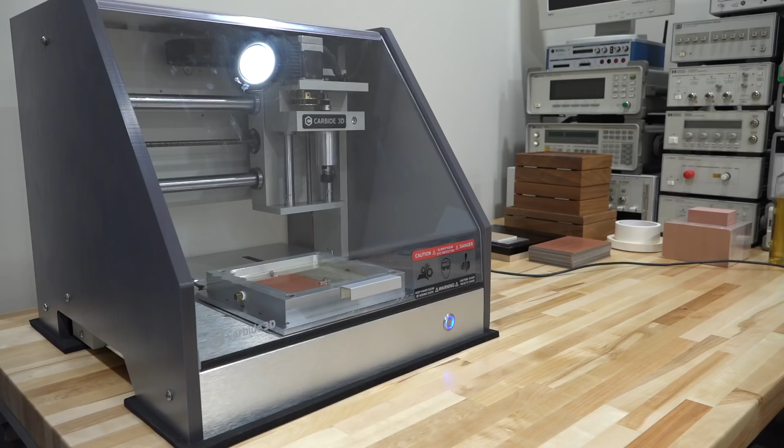In this episode, I've got another product review for you guys. Now, I've been wanting to get myself a CNC machine for a very long time. Of course, in my lab, I'm mostly interested in making PCBs, and a CNC machine can be used for that and a whole bunch of other applications. I was surprised to find out how many different models are actually available across a huge range of prices.

So eventually, after doing a lot of research, I ended up buying the Carbide 3D's Nomad 883 Pro, which you're looking at. Now, this is not a cheap machine. This is about $2,500. And any accessory that you buy for it is going to, of course, increase its price. So I ended up spending about $3,000 in total, American dollars.

Now, Carbide 3D is an American company, and everything is manufactured and built here in the United States. This is a very custom machine. So after doing a lot of research, I thought that this was the best bang for the buck. And I'll talk about a little bit of advantages and disadvantages and do a quick comparison with a few other machines. Now, since I'm a new user, I thought it would be also interesting to go through the procedure of making one PCB and see how it turns out.

I've also made some modifications to the machine which you might find useful if you want to do the same thing to your machine. So let's go ahead, take a look at some of the specifications, just a quick overview, and then we'll take a look at the machine in detail and see what we can make with it.

Well, let's take a look at this unit. Now, as you can see, it's a fully enclosed instrument here. And this enclosure is pretty important because it keeps the dust out, gives you some sound protection, but most importantly, it keeps you safe because those bits are very hard material and very brittle. And when they break, and they will break if you do something wrong, they will fly out of the machine and it can be quite dangerous.

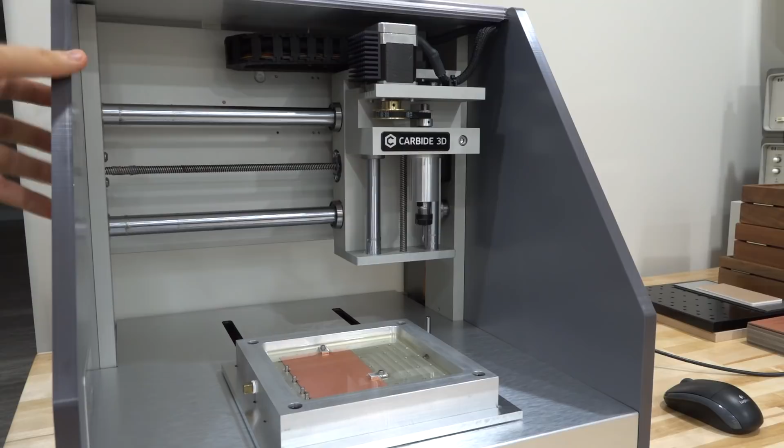Now, one of the main reasons why I bought this unit as opposed to some of the competitors is that this is a full aluminum chassis machine. So even though you see these HDPE sides and you can choose which color you want when you buy this unit, these are essentially just for the enclosure. The structural integrity of the machine is completely based on an aluminum chassis, which is custom made. So even if you remove this, the machine will be just fine. And I really like that. As you can imagine, you do want something that's very solid, and this definitely provides that.

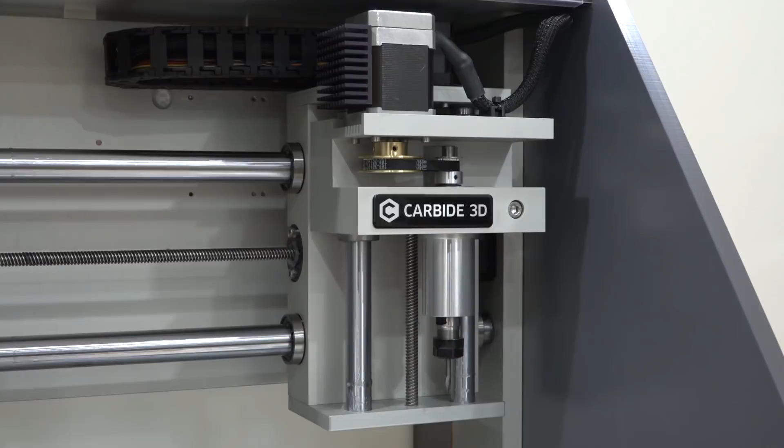Now, the spindle in the middle is also a completely custom design. It's somewhat of an unusual design. And if you look closely, you can see there is a belt-driven system. So we have a brushless motor with a belt connected to the spindle. Now, after the belt ratio and everything, the maximum RPM we can get over here is 10,000 RPM. And this is really one of the main limitations of this unit.

I would have loved to see this be able to do 20,000 or 25,000 RPM, especially for doing PCB and precise work. This would be quite handy. Now, at 10,000, I guess it's fine for the applications that I want, but I would have loved to see 25,000, especially because some of the other competitors do go to higher RPM. Of course, they do cost more as well.

This heatsink that you see here is something that I installed. Over long work, this thing can get a little bit warm. It's not really necessary. It's just to make it run a little bit colder and take the edge off.

And if you look carefully, you will notice that the main spindle, as well as the bottom, which you cannot see right now through the camera angle, these are all riding on 20 millimeter bearings. So there are no belts that drive anything in this. Everything is riding on bearings, which is fantastic, gives you very high precision. The slope of the screw here used to move the X, Y, and Z is chosen as a compromise between speed and accuracy. So you can have fast movement as well as very precise movements, and we'll take a look at the specification in just a second.

Cable management is great. I really like that. You can see there's absolutely nothing that can get in the way. All the cable is contained within this unit over here, and as the head moves, it will just unwind and wind back, and everything is very nicely done. I don't see anything sticking out that could potentially get caught, or during aging, it can get in the way. So I'm very happy with the custom design of this.

Now let's take a look at a couple of other things here. Now here you can see obviously the table will move back and forth there, and I will talk about what this piece is. This is a custom piece that I've made for the machine for some specific reasons, and we'll go over that when we're doing our experiment.

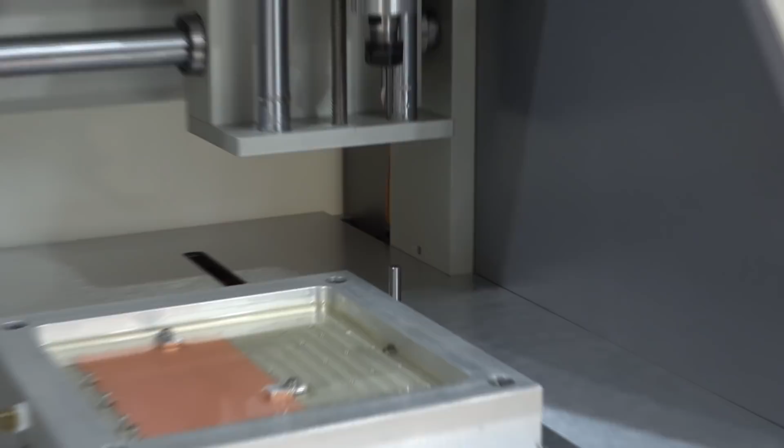And if you look over here, there is a tool depth measurement here that will be automatically built into the machine. This is a huge help. If you've ever used any of these, you will know immediately why. So every time you change the tool, because you don't exactly know how much you've inserted the tool into the spindle, this will remeasure and give you exactly the same reference point each time. Very handy, especially because this is done automatically. When the machine tells you that there's time to do a tool change, it will automatically do that for you.

So everything else other than that looks very nice. We've got power here, which is right now turned on, and the only two interfaces to the machine are a power supply and USB, and that's it. And the power supply is quite large, as you can imagine, because it needs to run all the motors and the spindle and all the electronics. You cannot see any of the electronics. It's all embedded at the back of the unit there. Very nice, very happy. It's quite a good looking machine actually. So let's go ahead and take a look at some of the specifications, do a quick comparison on the computer, and then let's see what the software does.

And here's the specification for the Nomad 883 Pro. And as you can see, the travel in the X and Y directions are 8 inches each. This gives you roughly the largest PCB area that you would be able to work in, or any other material that you would want to put through the CNC machine. The travel in the Z direction is 3 inches. Now that doesn't matter if you just want to do PCBs, but it will become important if you want to work on any other material.

The speed in the X, Y, Z directions are fairly typical. The mechanical resolution and repeatability are quite good. 1.5 mil for repeatability is respectable. And the mechanical accuracy of 5 mil per foot is also fairly respectable. Now the spindle speed is limited to 10,000 RPM. Yes, I wish this was better than that, especially for PCB work, but here it is and we will see how it performs. Everything else is really pretty straightforward.

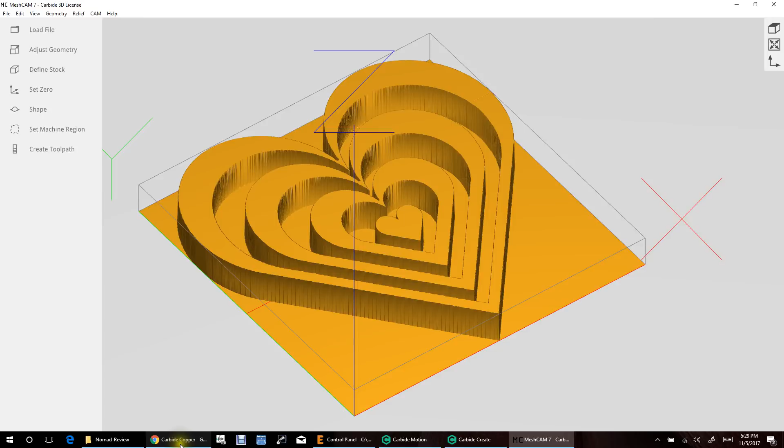Here I just simply loaded an image, and it will interpret the image as 3D, and it can do all kinds of fancy work on it. Really nice, not PCB related, but nonetheless it can be quite handy. Now, there's another beta software that Carbide has released, and it's called Carbide Copper, and this one runs in your browser. This will allow you to put a Gerber file into it, and then it will create for you all the machine code required to download it into the Nomad.

Now, this is in beta and it's very, very limited. And as far as I could tell, you cannot tell it, for example, the depth of drilling and all that. It just creates a toolpath for you, and it has some default value, and I couldn't figure out what that is. Again, this is an experimental software, but we'll use it anyway, because as a brand new user of CNC machines, I just wanted to know how easy it is to go through the entire process.

So what should we try as our first board? Well, I could design a board and make a schematic and do everything. I'm going to save that for a different video. I have some microwave designs that I want to share with you guys, which should be pretty fun. But right now I just want to see the flow. I want to see what kind of board I can produce.

So I went ahead and made in Eagle a very simple board, and this is it. It's a tiny one. It's 29.5 by 40.6 millimeters, and it has some features on it, as you can see, some drawings of shapes, just to see what comes out. So let's go ahead and open this and take a look and see what kind of dimensions we're dealing with here. So I have set my grid to 0.25 millimeter.

Now that's equivalent to about 10 mils, just under 10 mils. So some of my structures are tiny. For example, this one here is just a 10 mil by 10 mil square and spaced out by 10 mil to the adjacent one, and it slowly grows to be larger and larger and larger. So we can see what happens to these structures.

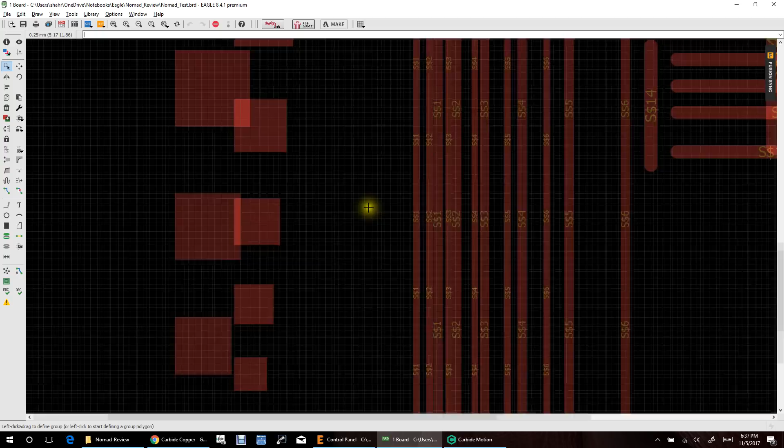And I have some lines here. These lines are also 10 mil, just under 10 mil, 0.25 millimeter, and the spacing varies, as you can see. Some circular structures, some thicker lines, some wider circles. These are half a millimeter, these are 1 millimeter. So you can see a few different structures. So we should be able to use this.

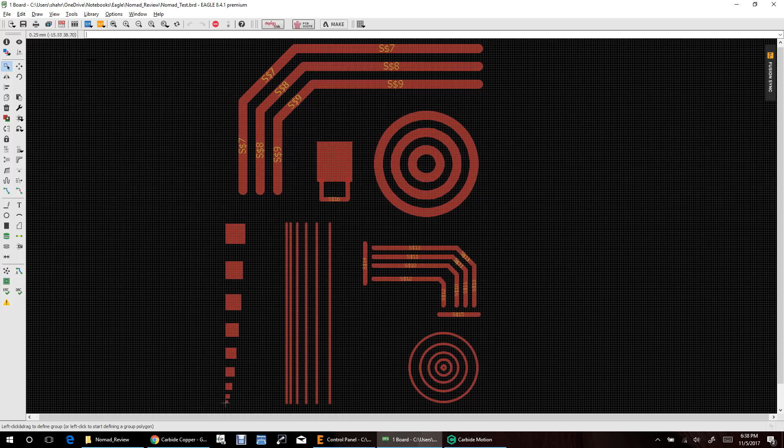Now, what can we do with this and how can we get it into the machine? Well, you need a processor, a CAM processor. It turns out that in order to create the proper Gerber files for our machine, Carbide 3D has already created a CAM processor specifically for Eagle. So we can go ahead and open it. Here is Carbide 3D's CAM processor. We open that, it sets everything for us.

It's going to create a Gerber RS274X version. Now we only are using top layer, so that's not a problem. So we've already selected the top layer there, and we can go process selection, and it will create our Gerber file. Is it there? We can go in the directory, and yes, indeed, it is there. Here is our top layer Gerber file. So now what do I do with this?

Well, I can go back to Carbide Copper, the online site and the online application. Now remember, this is very, very primitive, as I already described, but let's go and see what we can do with it. So this is a bottom side only. Sure, I can also fool it and say that it's a top side. It will just mirror it. It really doesn't matter. So bottom side only. Go next. Here I can load my Gerber file. Load it, and it should show up here. There it is. Here's everything.

Very nice, and you can see it's showing very clearly the isolation passes. So it has 3 isolation passes around it. Now I don't necessarily want 3 isolation passes, so let's try 1 pass. What the hell? Let's see what happens. So 1 pass here, just 1 time around, and just want to see what kind of margins we can get around it.

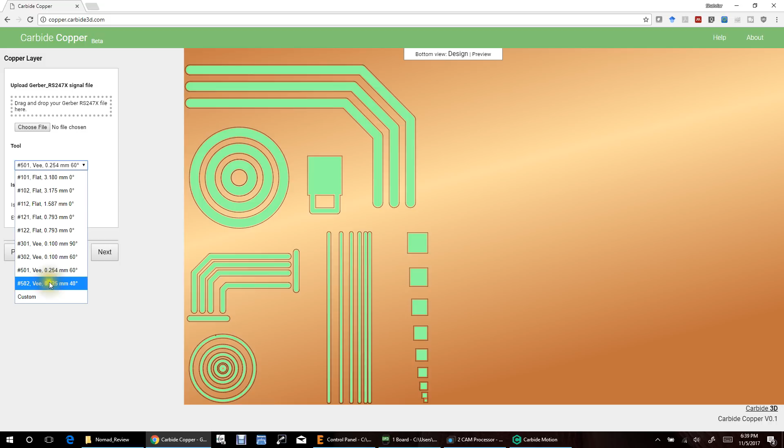Now, what tool are we using? Well, we're going to be using the 502. This tool is also from Carbide 3D. We can purchase that, and it's a 40 degree 0.125 millimeter. Okay, perfect. So we can go next. Now I don't have any drill holes, none of that stuff. So we can go next. We can ignore the outline. Forget all that. And there it is.

And this is what we're supposed to get from the machine. If I zoom in here, you can see some interesting features, for example, like that. So you can see it has only 1 clearance pass around each layer. So I'm very eager and curious to see how this would turn out. So now I can save it, generate and save to disk. There it is. It just creates this undefined file. So now I'm going to have to copy it into my directory and load it into the software.

Okay, we got our code right over here. So we go now to Carbide Motion. We're going to load this new file, the Nomad test. There it is. It gives you all the information about the toolpath extents that show up. Now we're ready to actually zero the machine. Obviously, you can't just run this. You have to make sure that the bit is in the correct location. So enough of the software. Let's go back to the machine.

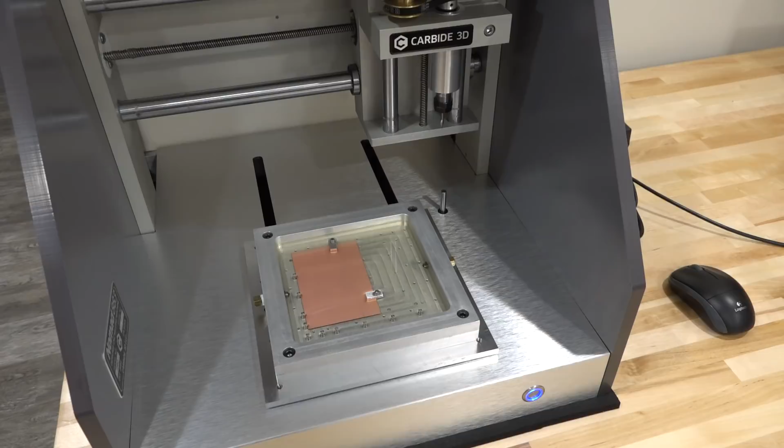So let's get the machine ready, but let's talk about dust control for a second. Obviously closing the machine will control the dust, that's no problem. But as with any machine, once you start milling anything inside, dust is going to get everywhere inside the machine.

It's going to land on the bearing, it's going to land on the gears. You're going to have to constantly clean it. It can go through the gaps and end up on the table. So there's a couple of ways to avoid that.

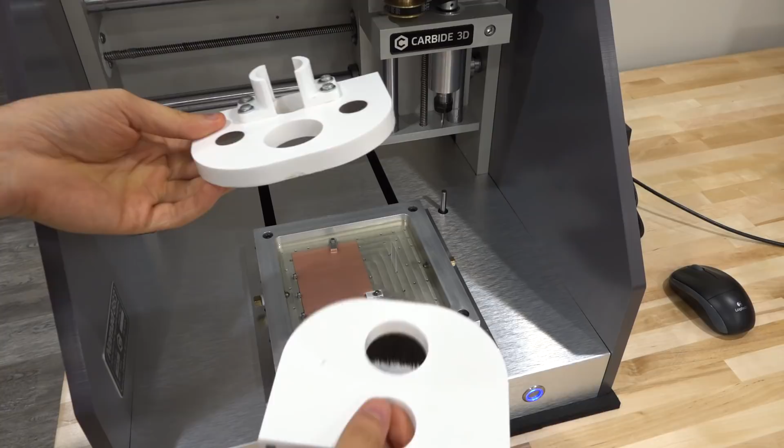The clever people on the Carbide 3D forum have created something like this. Check this out. This little guy, which was actually machined with this machine also, can be attached to the spindle. Once attached, this part is permanently there, and the spindle will go right through here so the bit will be essentially touching whatever you're trying to mill, and this wouldn't be in the way. Then at the bottom piece we have this, which has got brushes on it, and this can be magnetically connected to the other one, like this.

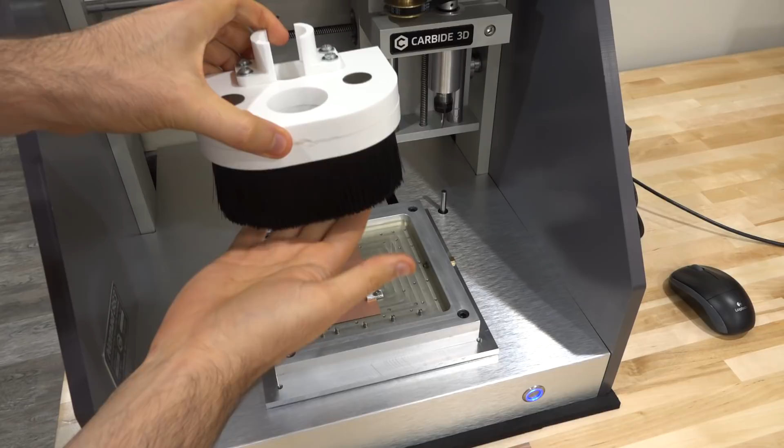There you go. Now they're both attached to each other, and underneath this area is where you'll be doing any work. Then you can have a vacuum connected to here, so it will suck air out as well as all the particles and dust that's generated. When you're done, you just remove this, change your tool, and put this guy back there.

So the air will flow through here and out of there, and of course it will carry all the particles with it. This is great when you have something with various heights, because this will accommodate different heights. It's very good for CNCing things that create a lot of dust, like wood or maybe even metal, if you have sufficient airflow to carry it out. So this is good and nice, but not quite suitable for PCBs or for what I wanted, and it can get kind of in the way.

So what I thought to do is something totally different. Now for PCBs, the situation is actually a little bit more complicated, because especially if you're doing things like FR4 - this board is not FR4, it's FR1, but if you're using FR4, that's basically glass.

And when you mill that, you can get particles as small as 30 micron. So you'll have to filter those really well with a HEPA filter, otherwise it's going to end up in your lungs, and it's really, really bad for you. So take that very seriously. This is not something to be taken lightly. It's quite dangerous to breathe in dust, glass particles like that.

So I thought, let's do something to avoid that, and I came up with this solution. Now this obviously doesn't ship with the machine - this is something I specifically made for this machine. So this is an aluminum plate that sits on top of the existing plate that the machine comes with. It screws into this, and it has to be extremely flat because we're going to be using it for PCB milling.

In there are pins to allow you to align your PCB and little clamps to screw onto this surface, so the PCB is really nicely sitting there, completely flat, and cannot be moved. It can even be flipped once you want to do a more than one layer design there.

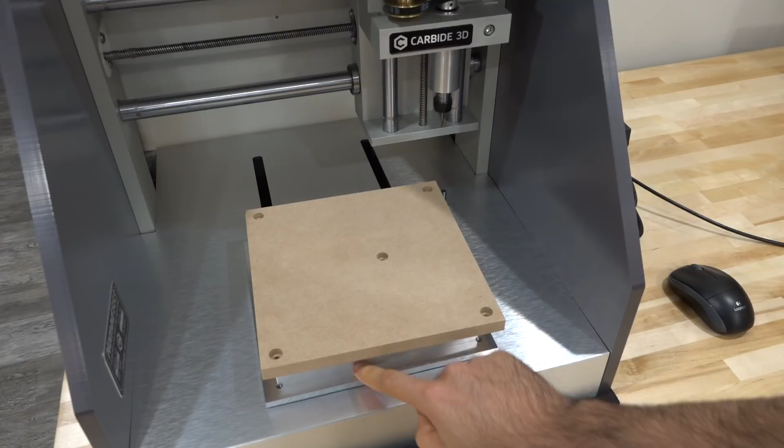Normally, the machine will come with something like this, which gets screwed onto that original plate underneath, and then you tape your PCB with two-sided tape on top, then take the tape off. But I didn't want to go with this direction, though it's definitely a possibility. You can also buy a metallic plate with a lot of screw holes for flexibility in attaching different things to the machine, but this isn't required here. So, we're good.

We're ready to go. Now we just have to initialize the machine and zero it. Zeroing the machine is a little bit tricky for PCBs, but we're going to take a look and see how that's done. First, let's go through the initialization.

After you initialize the machine, which is really straightforward, you can align and zero it. Here we have a very basic set of controls which allows us to move the machine in all three axes with various increments, the smallest being 0.01 millimeter. I can change the increment to 1 millimeter or use fast mode, which moves it quickly so you can get to your final position, and then reduce the steps to fine tune it.

Bringing the X and Y to the zero position is easy. Bringing the Z to the zero position is a little bit more tricky, and I have a little method to do that using a multimeter.

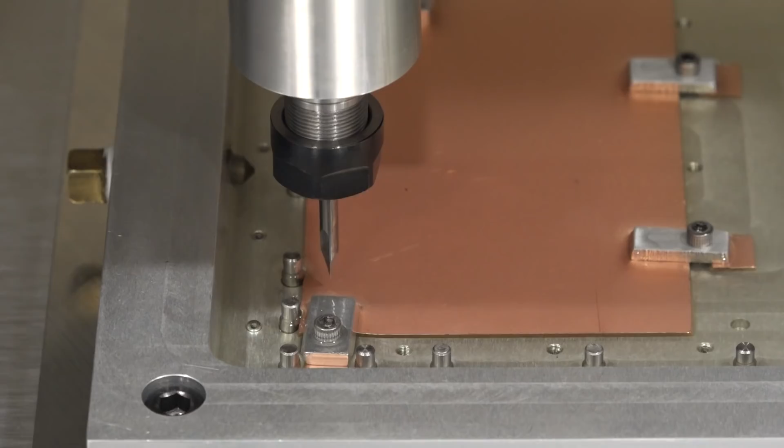Let's take a look. I've brought the tool very close to the surface of the PCB. It's not quite touching. I'm happy with the X and Y position—I could maybe move it a little bit in each direction, but I'd say I'm pretty happy with where it is right now. So we can go ahead and try to zero it.

So the question is, how do we detect when the tool touches the PCB? It turns out there's a difference in resistance we can easily measure. The resistance between the tip of this probe and the chassis, when not connected to the PCB, is about 150 ohms, sometimes about 50 ohms—it has to do with the bearings and the position of everything, because the machine is connected together electrically, but not very well. But as soon as the tip touches the surface of the PCB, we get roughly 0 ohms, so we can use that to detect contact.

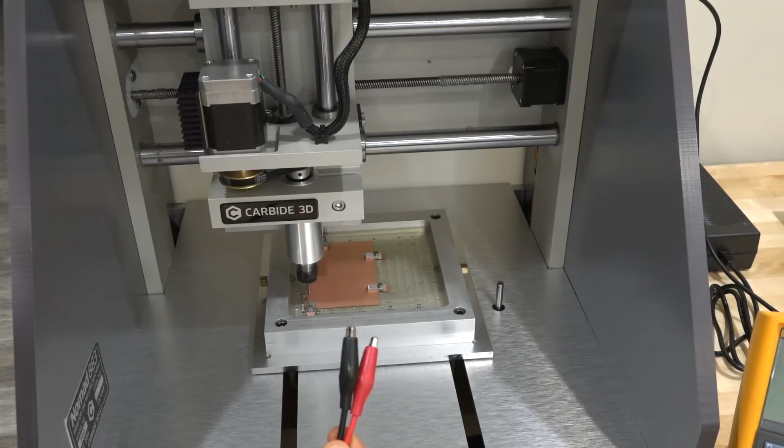How do we do this? We can connect two alligator clips directly to the tip of that bit and to one of the screws holding the PCB down. That should be pretty easy. Let's set that up—and here is our setup.

The resistance between the tip and one of the screws holding the PCB is 128 ohms, and I can very slowly move the tip down, getting closer and closer to the PCB until we hit 0 ohms. I think it's almost there. Let's keep going—you can see the resistance changes a little bit each time there's a step, because of the positions of the bearings. But we're getting closer and closer to the point where it touches the PCB.

So I'm going to keep going until I get that resistance down. It's very difficult to see or judge the distance. There you go—we're still good. We should almost be there any second now. There you go, there it is.

Zero. So now if I move it up by exactly 10 microns, 0.01 millimeter... if I move it down by 0.01 millimeter, we get a short. If I move it up by 0.01 millimeter, we have nothing. So we're at the resolution of the machine here—as precise as I can possibly get it.

So now what I do is raise it by 100 microns, 0.1 millimeter. Why that number? Well, in the software that you saw, I actually can't control the depth in which it goes down.

And I did some experiments, and I think 0.1 millimeter should work, or it may not be enough. But anyway, this is an experiment, we'll find out. So right now where it's shorted, I will move it up by exactly 0.1 millimeter, and then we're going to run the code and see what happens.

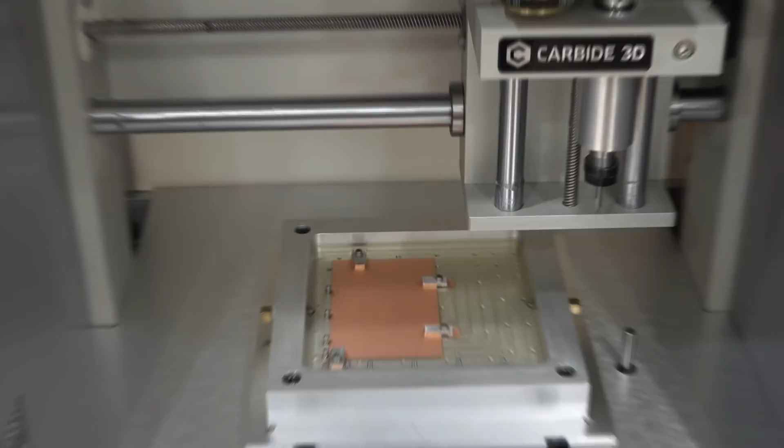So let's see what happens. That's exciting, here we go. Let me zoom in here. It's going to get started. Here's the motor, and here's the first position. There it is, it's doing it.

So I'm not sure if the depth is correct, but we're going to find out. Here's the first one—oh, I don't think I can focus that much. I don't know how well you can hear me, but the machine is actually surprisingly quiet. So now we're going to let it go through all this and see what happens, and I'll let you know exactly how long it takes.

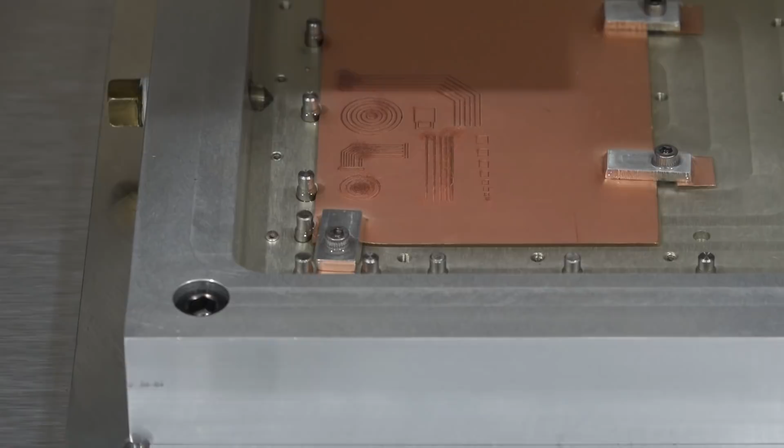And here we go, we're done. So now we're going to take this out, clean it up, and put it under the microscope to take a look at some of the features. Looking at it, I can already see that the depth was too much and it basically destroyed some of the traces. But we can still get some information about the quality of the traces, and then we can judge and adjust for our next PCB.

Alright, here is the result under the microscope. As you can see right off the bat, we have a flatness problem. On the very right side of the board, this is where the clamp was, and the board is the lowest, so the drill bit didn't have enough penetration to actually clear the copper completely away. As we move away from the clamp, the board rises a little bit, and then we have sufficient penetration. Now these lines are our thinnest lines.

They're supposed to be 10 mil, just under 10 mil, 250 microns. So let's do some measurement on these lines. Let's take this one over here, for example. I'm measuring right across it as well as I can with my mouse here, and we're looking around 250 microns. It's actually quite accurate, but some of them are a bit thinner.

Let's take the one at the bottom here. I would say this is probably a good one. There you go, 0.186 millimeters. So yes, it is about 70 microns too short, too narrow. And I think this is because we were etching a little bit too much on this side. As we get further and further away to our right side, we get wider lines.

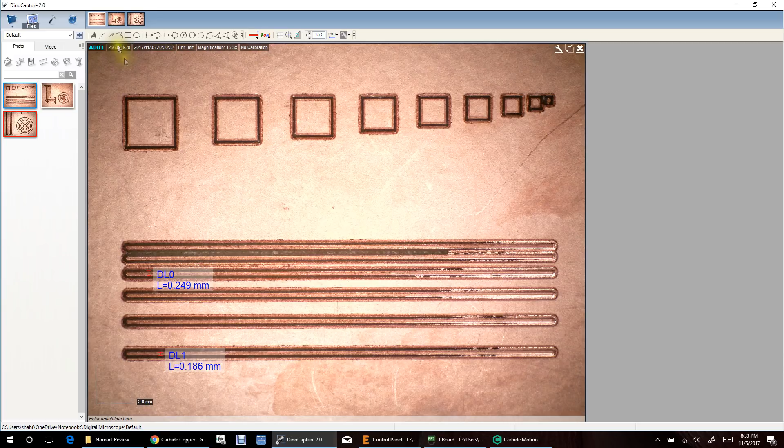Now, I'm not sure if this is good enough for normal use. We have to do some more experiments and build bigger circuits with it. But nonetheless, I'm fairly happy with the result we're getting. Let's measure another one of these guys. I think this is probably fairly okay—yeah, they're about 250 microns.

Not too bad. Now, the distance between two lines from center to center is supposed to be 0.5 millimeter, and we are about 0.5 millimeter. That's not too bad. Further away, we should be about 1 millimeter—I think from here to here is 1 millimeter. There we go, and we get 1 millimeter. So the distances are quite good. That penetration depth is going to be very important, and the calibration for that is going to be very important.

So we can also measure one of these squares. This square over here should be 2 millimeters across, and it is 2 millimeters across, no problem. And the smallest square at the right, it's almost disappeared. That's supposed to be 250 micron, but the one right next to it is supposed to be 0.5 millimeter.

And you can see that it's also 25 microns or so short. So this is all normal because we are etching away a little bit too much, and as we get further from the clamp, you can see the result gets better. So I'm quite happy with these, and you can see some roughness around the edges, and this is where the speed, the RPM, would be really helpful. Unfortunately, we are limited at 10,000, but I think with a higher RPM, this might have been better.

And also this particular PCB I'm using may not be very good. So I'm going to get some FR4 and we're going to try it on that and see how much better these things can possibly be, or maybe even worse, depending on the material there. So now let's look at some of the other sections.

So here's the circles. And as you can see, this outer circle here also has some etching or cutting issue. And this is again because we're closer to another clamping point on the right side there. Now, if I go ahead and measure the distance from here to here, we also have about 250 micron, which is what it was supposed to be.

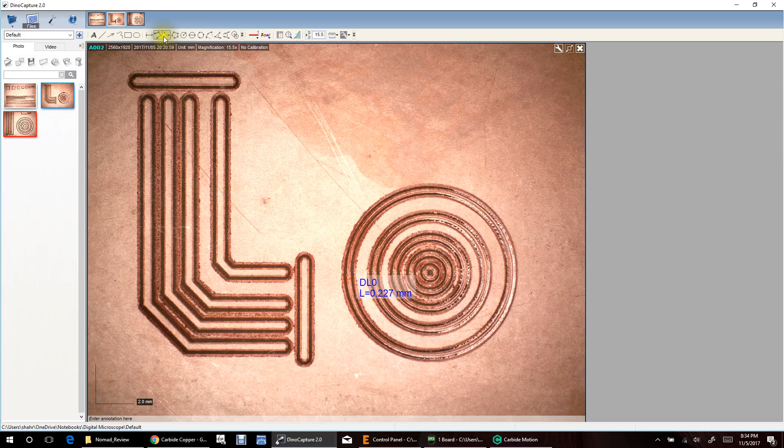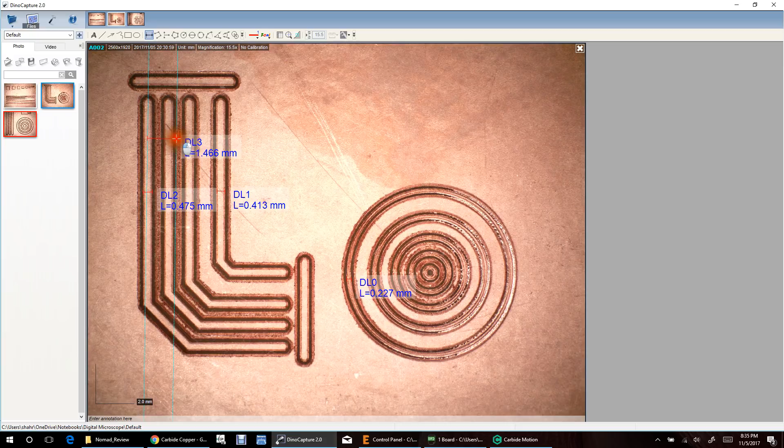And these lines over here are supposed to be 0.5 millimeter. And you can see they're cut a little bit too much. The penetration depth here is definitely more on this side, and if I measure another one from here to here, you can see we will have exactly the same issue in terms of cutting. But let's try center to center. From here roughly to about here, we should have about 1 millimeter, and we do. So the distances are definitely not too bad.

And the final big circle, you can see again some roughness around these edges here, but everything else looks fairly good. This thickness here, which is supposed to be around 1 millimeter, you can see it's definitely cut a little bit too much, the penetration depth here. If you were to compare, we can actually measure how deep this cut is, right? It's about 250 micron, this cut.

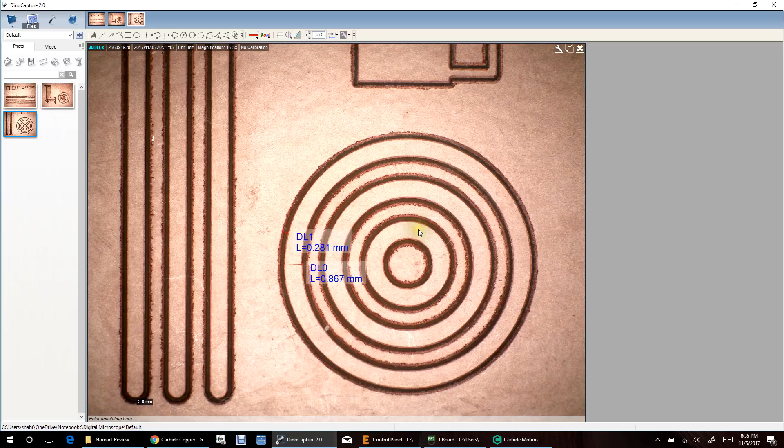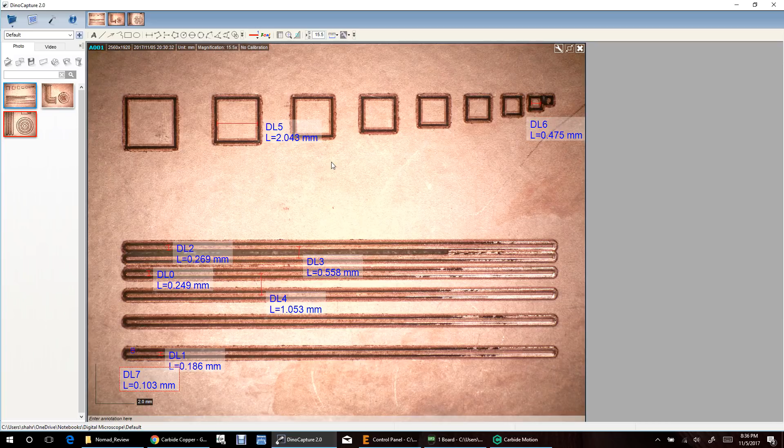Whereas the first one, you can measure this, and the cut here is quite a bit narrower. Yep, you can see it's quite a bit narrower. It's about more than a factor of 2. So definitely there is some flatness issue, and that's going to be very critical. So I'm going to have to think about how to improve that so we can get better results. But this is not too bad for our first experiment.

And there you have it, a quick look at the Nomad 883 Pro. As we can see, it's a very capable and precise machine, and I'm eager to do some more work with it to be able to judge its performance across more examples than just some test patterns. Of course, we have to make full PCBs with it, and I'm going to have to do that in the future.